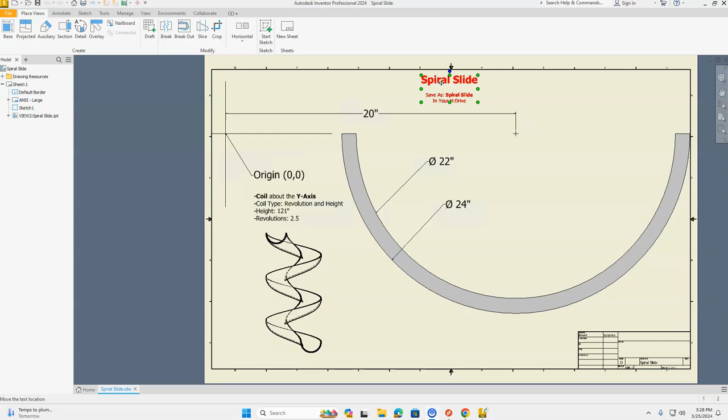To begin, we're going to start with New file in the top left hand corner. Select New from the pull down menu, and then we're going to choose standard.ipt, this one right here, and click Create.

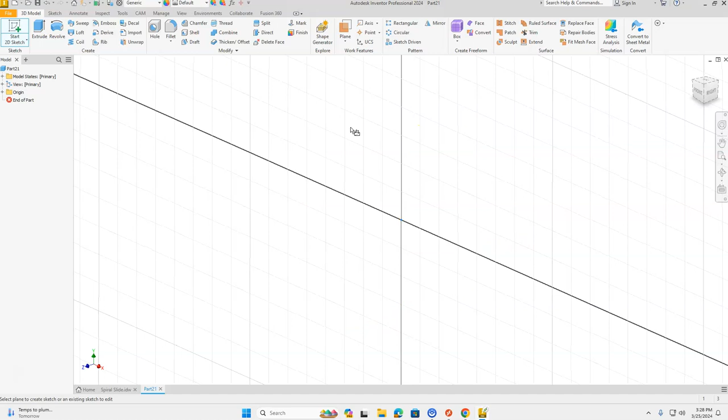Then to begin, we're going to start by clicking on our icon to start a 2D sketch, the drawing with the green plus mark, and place it on our XY plane. Click Front in our World View Cube to zoom out. And now let's take a look at how to begin.

You should have your drawing in your packet that looks like this. To start with, our origin is off here to the side, marked as our origin, that's X0, Y0. And we have these two circles that are going to make the bottom of our spiral slide. The center of that is 20 inches from the origin right here. To do that, we're going to make a straight line from the origin out 20 inches, and the end point of that line is the center of these two circles.

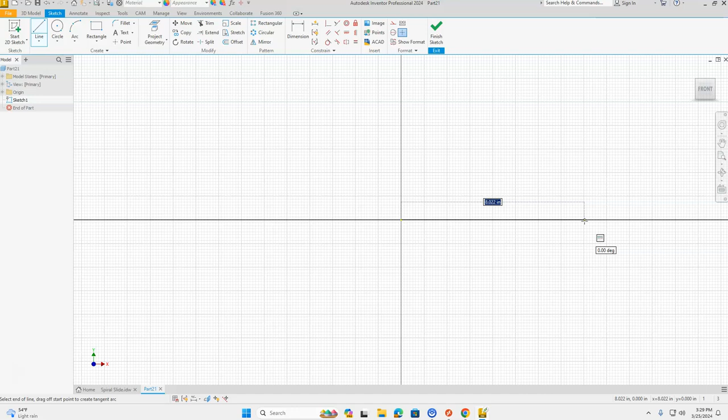Okay, to begin, let's start with that 20-inch line. We're going to use our line tool from the Create menu in the ribbon bar. Begin at our origin when we get our green dot. We want this to go out to the right hand side, and we want our degree setting to 0, and we're going to type in our distance of 20 inches. Press enter on the keyboard.

The line kind of went off to the side, so we're going to click Front in our World View Cube to zoom all. Press the escape key to let go of our line tool.

Next, we're going to get our circles drawn. So if we take a look at our drawing, we have a 22-inch circle for the inside of the slide and a 24-inch circle for the outside of the slide. So let's create those next.

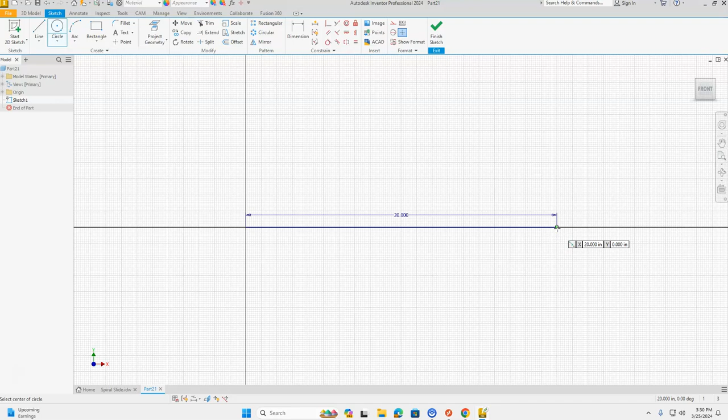We're going to use our circle tool. We're going to start at the end point of that 20-inch line we just created. And we're going to stretch out a circle, and this one is 22 inches for the inside of the slide. Press enter on the keyboard.

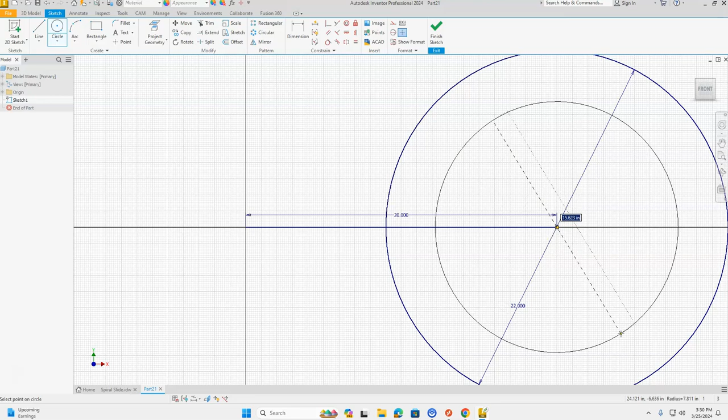Still with our circle tool, we're going to get our green dot again on the end point of that 20-inch line. Click. We're going to stretch this one out, and this one we're going to change to 24 inches and press enter on the keyboard. We're going to click Front in our World View Cube to zoom all and get our drawing on the screen.

Press the escape key to let go of your circle tool. Now we're going to take and extend this line, the 20-inch line, going across until it reaches the outside of this circle here. Then we can trim up to take away the upper part of the circles and the parts of the lines that we don't need anymore.

To do that, we're going to use two tools. One of them is Extend right here in the Modify section in our ribbon bar. The other one is Trim. First, we're going to extend, we're going to take and extend.

You can see that line show up over here when I touch the red line. And when I click that, I'm going to get this error menu that comes up that says it already has a dimension. Let's press cancel on that.

That's showing up because we told Inventor that this line is 20 inches. So in order to extend that line, we need to delete this dimension here. So I'm going to press the escape key to let go of the extend tool that I was holding. I'm going to click my 20-inch dimension and press delete on the keyboard.

Now I'm going to get my extend tool again. I'm going to extend that line, now across to the inside of the circle. I want to extend it again by clicking on the line, and now I'm to the outside of the outermost circle. Press the escape key to let go of the extend tool.

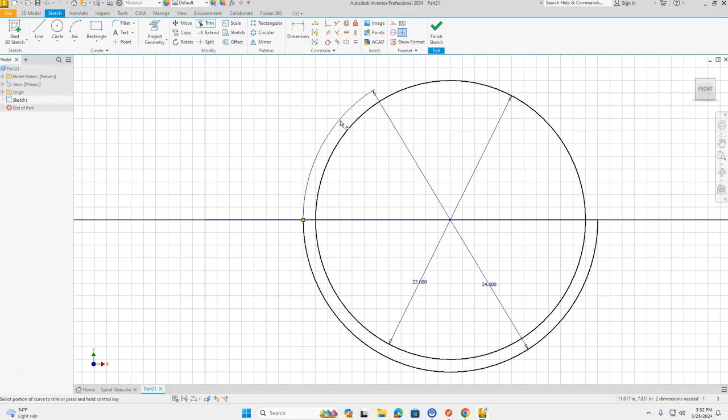And now we're going to trim. Let's take care of the top of our circles first. I want to trim out the top of this circle here and the top of the inside circle. And now I have the line to contend with, so I want the inside between the two circles to get trimmed out and the outside over here towards our origin on the left.

Press the escape key. So now I should have the outside bottom arc of the circle, the inside bottom arc of our circle, a skinny line up here at the top on the left hand side and a skinny line up here on the top on the right hand side. So now we have our profile drawn. Let's hit the green check mark, finish sketch.

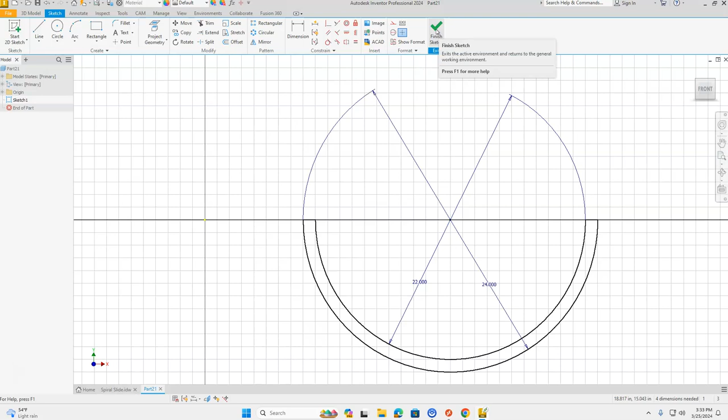Seems to have went off our screen, but we're not going to worry about that. We know that if we click up by our home view, click by our world view cube, click our home view, that's going to take and show us our drawing. Next, let's take a look at our part, our multi-view drawing.

So we have this profile already created, 20 inches out from the origin, and now we want to use a tool called coil, and we're going to coil about the y-axis. Okay, so that's the first thing we're going to take a look at.

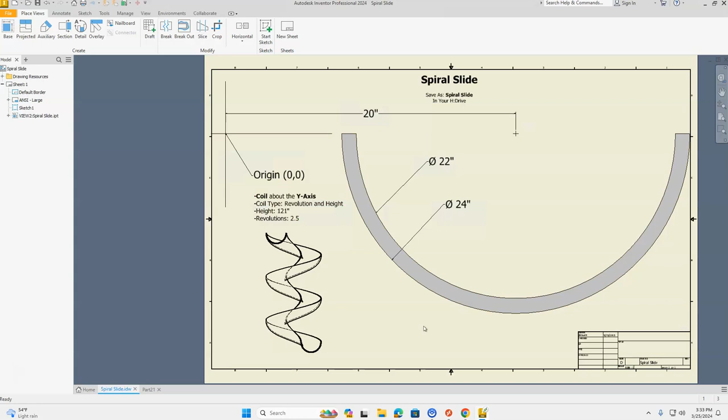So in our create menu in our ribbon bar, we're going to find coil. It's right here. This menu is going to show up, and with our coil, it already selected our profile. You see it highlighted blue here. If this doesn't automatically highlight blue, you may have to click this shape, the profile, in order to select it.

The next thing we need to do is select our axis. So I'm going to select axis, and to do that, I'm going to go over by our origin folder in our model browser. In front of the origin folder, there is a plus mark. We're going to click on the plus mark to expand that.

And when I move my mouse over the top of these axes, here's my x-axis, y-axis, and z-axis. You can see when I hover my mouse over the top, it shows what those axes look like. We want to select the y-axis because on our drawing it says coil about the y-axis. So on my part, I want to find my y-axis. You can see it's highlighted when it goes red, and we're going to click that to choose it.

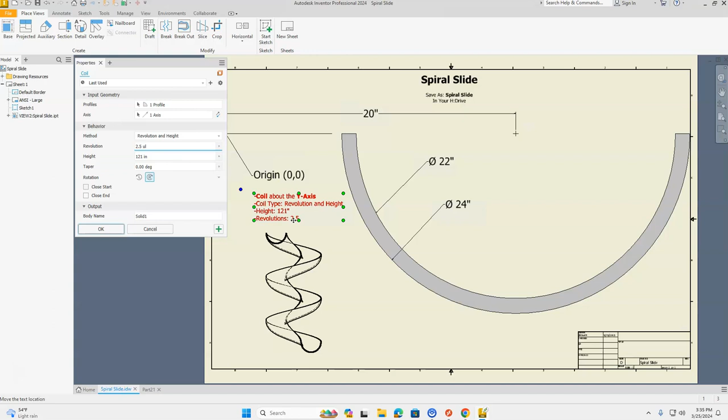Let's go back to our drawing, our multi-view drawing. Our coil type, we want revolution and height with a height of 121 and revolutions of 2.5 for our revolutions. Okay, let's enter that in.

So on our menu coming down, we want revolution and height. Click the pull down menu right here. We want to have 2.5 revolutions, and we want to change our height to 121 for our height.

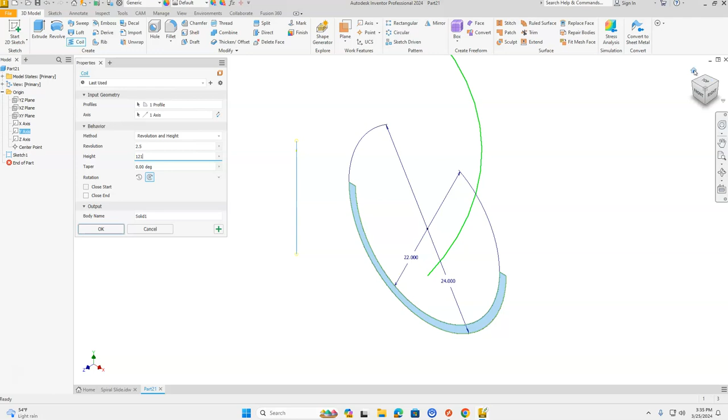Okay, now before we select OK, let's go home in our world view cube to zoom out to see what's going to happen. So our profile is going to follow this path, 2.5 revolutions to a height of 121 inches, and click OK. That looks awesome, doesn't it?

Okay, now let's go and save this part. We're going to go up to the orange file in the top left hand corner. We're going to go down to Save As. We're going to put this into our H drive. Remember, this must say your first initial, last name, 000, and part 21 is not a good name for this part. We're going to highlight that, and we're going to call this Spiral Slide.

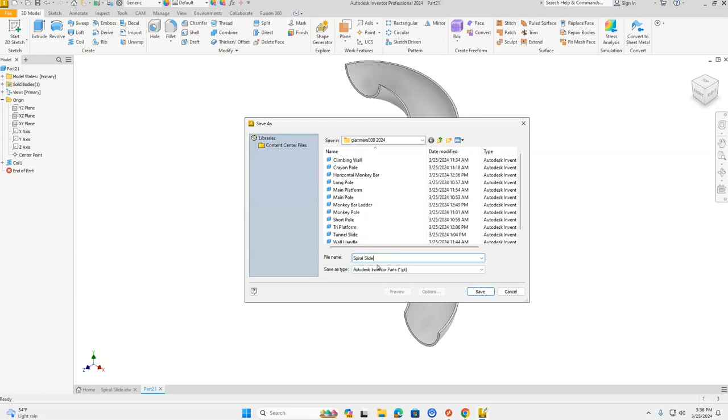Spiral Slide into our H drive, click Save. You can tell we saved it as Spiral Slide because up here in the top it says Spiral Slide. And this is the final part if you're doing them in order that they are in a packet. This is the final part for our playground set.